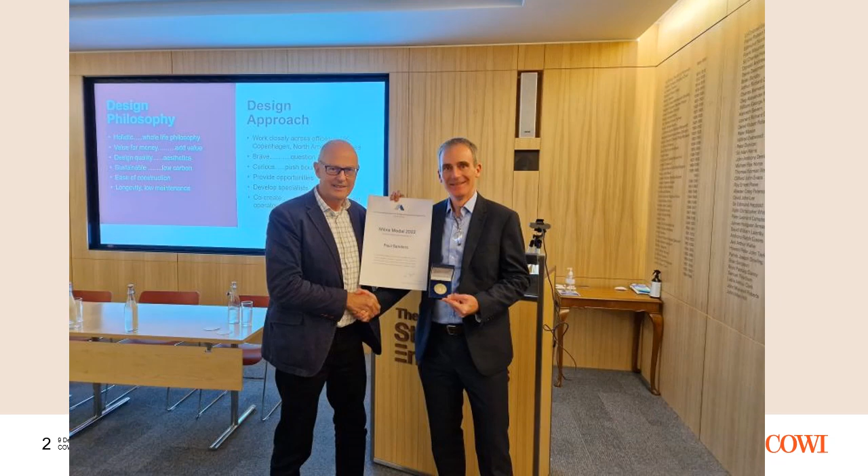I joined what was Flint and Neil and has now become part of COWI in the UK a little over 20 years ago. At that time, it was a partnership run by Ian Firth and David McKenzie. It's now part of a much bigger organisation. But I think the philosophy that Ian and David brought, or had with the organisation, and brought through into COWI still remains very firm, and I think it can be summarised as follows.

And indeed, preparing for this lecture was a very good opportunity for me to condense my thoughts in this regard. I think we try to bring a holistic, whole life approach to all of our projects. We like to add value, and that's not just monetary value, that's adding value in lots of different regards. Design quality has always been at the forefront of what we do, and that's a philosophy that's very much been promoted by Ian Firth.

I think it's best summarised by his Institution of Structural Engineers presidential address just a few years ago. We work with architects on a great number of our projects, and I think that again is an extremely important way of adding value. That collaboration is really key to what we do. Sustainability has always been at the heart of what we do. I think the last few years have seen that condensed into a real focus around embodied carbon, but I think again that rings very true to what we do.

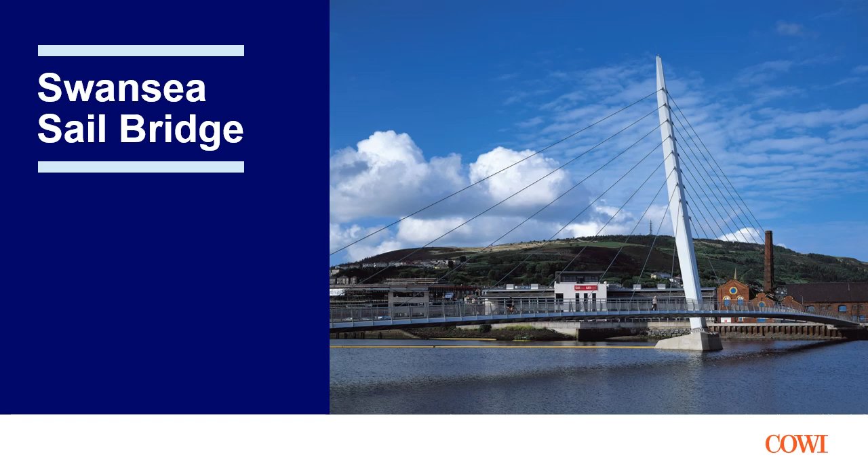So this was my first experience of working closely with architects and really starting to appreciate the value that they bring to projects such as this. I was very fortunate to work with Jim Eyre, who heads up Wilkinson Eyre, together with Martin Knight and Ben Addy, who I've gone on to work with on many other projects through the years.

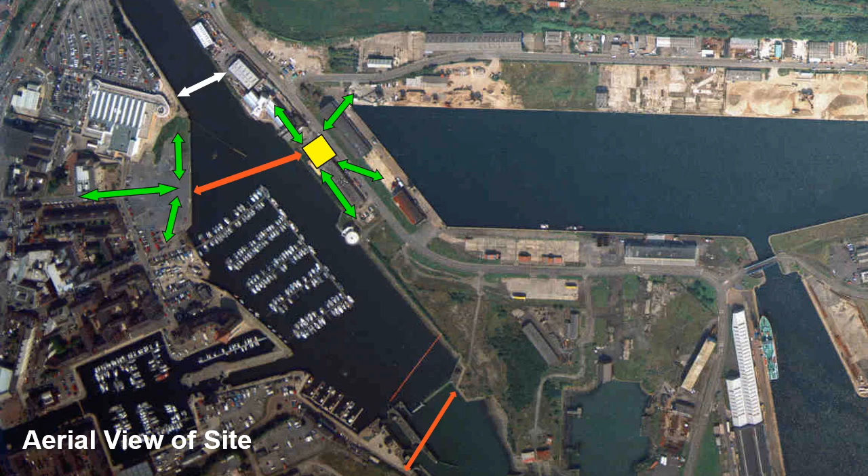This is the design that was developed for the Sail Bridge, very closely developed by Wilkinson Eyre and ourselves. The cable stayed bridge itself consists of a 42-metre high steel mast which is leaning backwards, with a gently curving deck which is supported off one side by a series of cable stays. Structurally, it's quite a unique configuration, I believe.

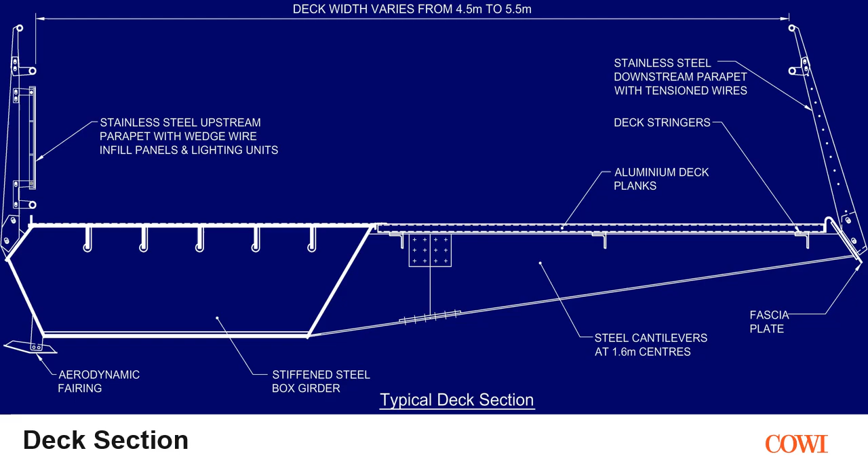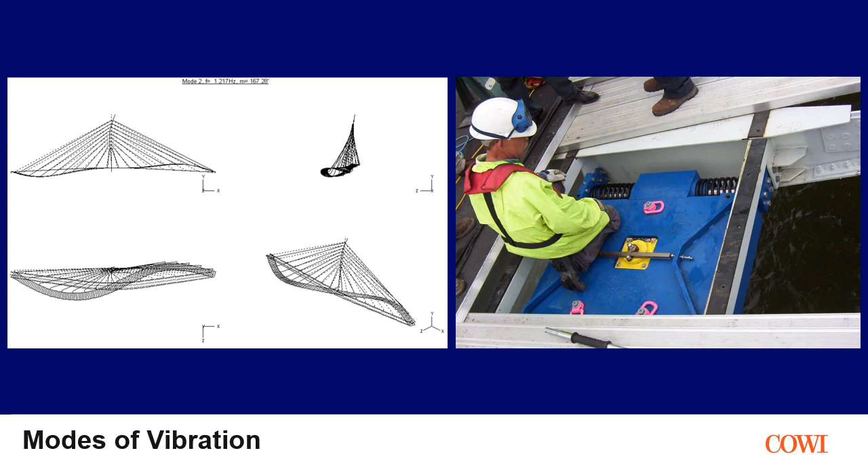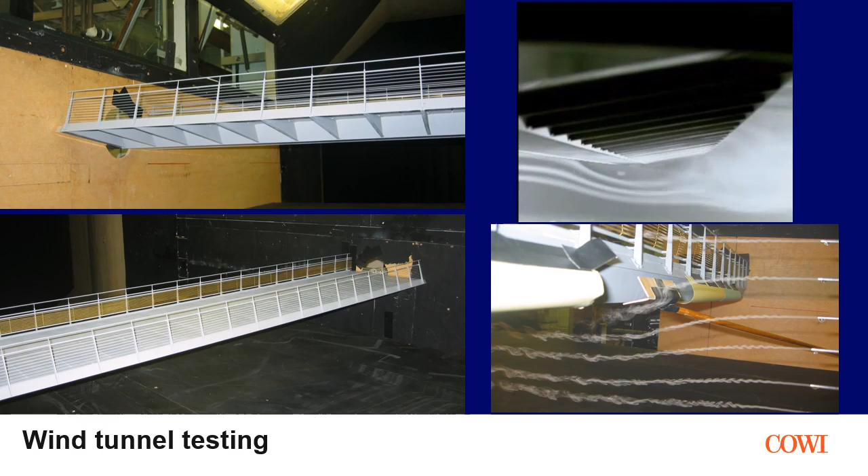This was typical of how Chris went about solving the problem. He investigated changes to the shape of the bridge deck cross section to get rid of the vortex induced vibration, and quickly concluded that adding an aerodynamic fairing on the upstream lower edge, shown in this photograph, provided a very effective means of suppressing it. It works by preventing the flow detaching so soon, which adequately suppresses the vortex induced vibrations. We were still at a point in fabrication where we could detail these stainless steel fairings and fix them on the upstream edge—it was quite a neat solution.

This photograph also gives you a good appreciation of the parapets, in this case all stainless steel, very carefully detailed. That's important because the user experience is all around the quality of those finishes.

Now to talk about the construction—this goes back to one of the key philosophies I spoke about earlier, collaboration with the builder. The mast itself was actually quite a complicated geometry. We engaged in very early discussions with Rowecord, the fabricator, to understand what was and wasn't possible. Basically the mast geometry is defined by a series of flat plates—there are no warped plates—but through careful sculpting by the architects, we were able to come up with this fantastic looking mast geometry.

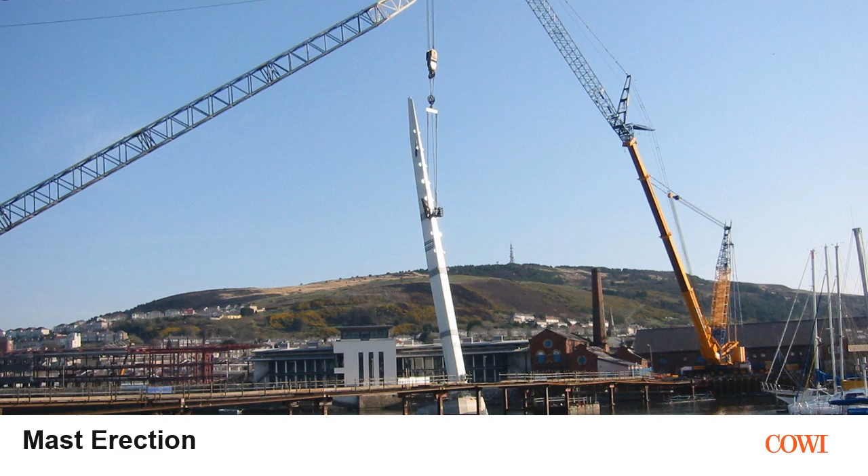This was then the erection of the mast. The mast itself weighed around 80 tons, and was erected using a crane positioned with a lift radius of around 80 meters. At the time, this was one of the largest mobile cranes used in the UK. By erecting the mast as one completed unit, we ensured better quality of construction and a faster construction program—one of the key aspirations of our client, the Welsh Development Agency. That approach was developed in conjunction with the contractor Balfour Beatty.

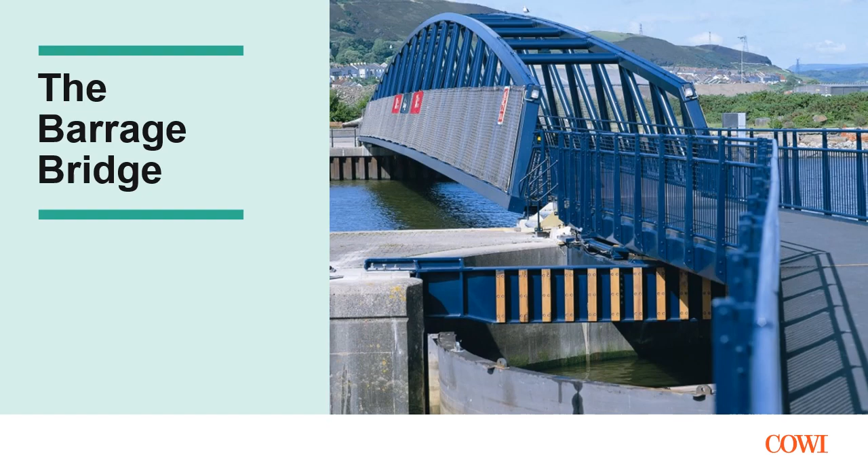Now, I did mention at the beginning that the Sail Bridge was one of a pair of bridges. The other bridge was what we call the Barrage Bridge, which crosses, not surprisingly, over the barrage somewhat further south. It's not necessarily the most hospitable of locations, but the real eye-opener for me was that even though this was a secondary bridge, it was still given a significant degree of care and attention in terms of detailing.

In this photograph you can see the Barrage Bridge, with the Sail Bridge in the background. Working closely with the architects, they showed me that by carefully modifying the geometry of the Warren Truss, you could come up with something reasonably attractive, even though it's a low-cost solution. I think you'd probably agree it's quite an elegant structure, even though it's quite modest.

It's around a 70-meter span and about 5 meters wide. The view on the right-hand side gives you a feel for the user experience—by inclining the mast and the trusses inwards, you enclose users, creating a safer feel, and you increase the structural efficiency by stabilizing the top chord using those simple transverse bracing members.

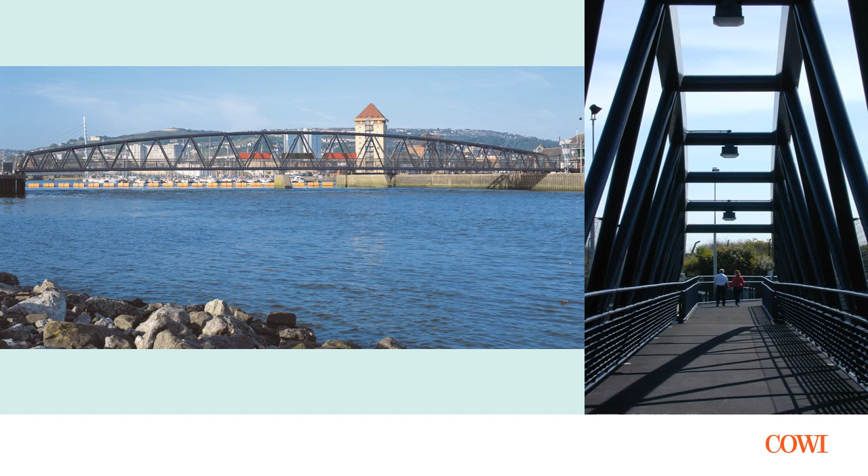The next bridge I'm going to talk about is the Schuman Bridge in Lyon, France. This was a project we won through a design competition with Explorations Architecture, a Paris-based firm we've had a very successful track record with, together with consulting engineers Agibat from France. Our role was to design the superstructure, the deck and the arch, as well as leading the design team overall.

This was a hugely challenging project for me personally, because slightly embarrassingly, I don't speak French. I managed to attend numerous meetings over the 18 months or so that the design period lasted, and I managed to understand enough of what was being said, even though I struggled to reply. The bridge itself is located adjacent to a UNESCO World Heritage Site in Lyon, and for that reason enormous focus was placed on the appearance of the bridge.

So this shows the overall geometry of the bridge. You've got main spans of around 85 meters. We decided very early on that we didn't want any cable stays, we didn't want masts. We wanted a very flat structure, as near invisible as possible given the setting, yet with a fairly significant span that does introduce a challenge.

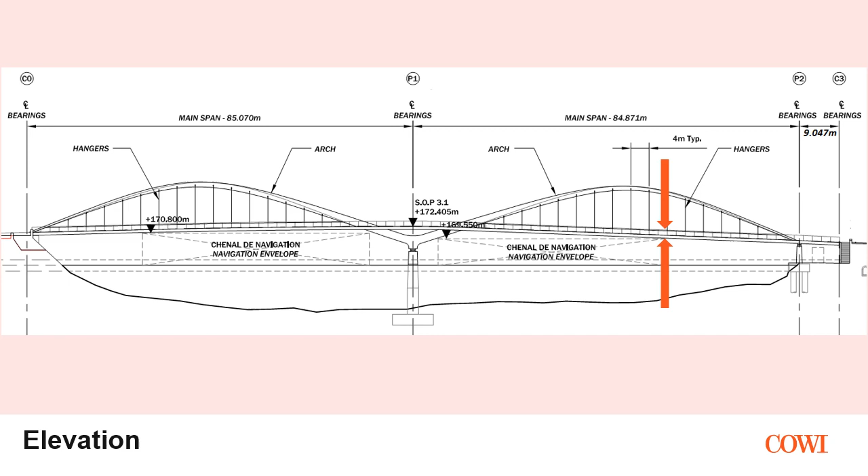So the solution was this wonderfully slender arch. In cross section here, you can see the very shallow deck, only around 600 millimeters deep, and the arches inclined and leaning outwards. We used the arches to actually separate pedestrians from vehicle traffic, and I think that adds something quite special to the quality of the design.

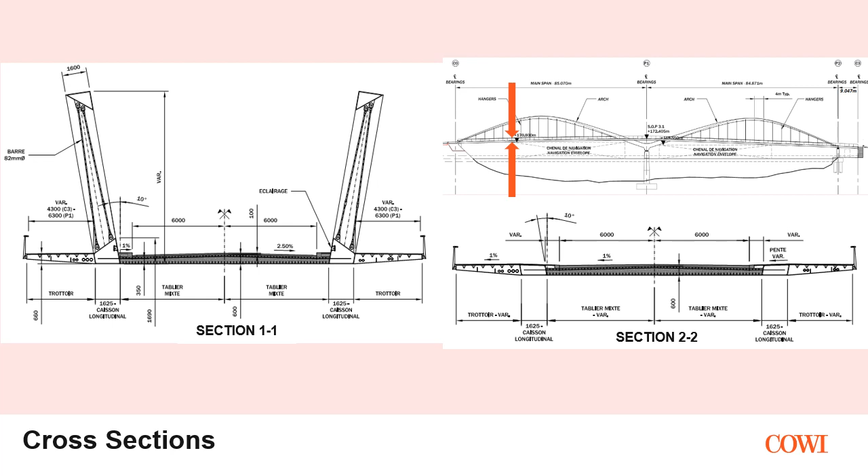Again, this is the perfect example of that very close collaboration with the architects. There was a drive to create these nice wide footways and to create places that people want to stop and rest and enjoy the fantastic views up and down the river.

Besides having this wonderfully slender, unbraced arch, the architects wanted to exploit the arch's ability to reflect light by creating a twisted profile to the arch. To the best of our understanding, this is the first time this kind of design has been developed. It's done, on the face of it, in a very simple way, by taking what's called WP3, the outward pointing edge of the arch, and moving it up as you go from section A to section B to section C, then back down.

That means the two primary top and bottom plates of the arch are warped, twisted, whereas the inside face of the arch is maintained on a constant plane with no twisting there. Key challenges for us were, first, how do we design the arch for such a twist? There are no design rules available for such a variation. And secondly, could it be fabricated?

In terms of the fabrication, we went to Victor Buyck, the fabricators, and had some very early discussions within the design period about how this could be done. They were very confident it was feasible and gave us some fantastic advice.

The fabrication process itself, here you can see a section of the arch being fabricated by Cordioli, the Italian fabricator who eventually won the contract. The wonderful thing for me is understanding the whole fabrication process, and particularly working with their very skilled craftsmen, I would call them artisans, who were able to introduce the twist that we wanted to the arch.

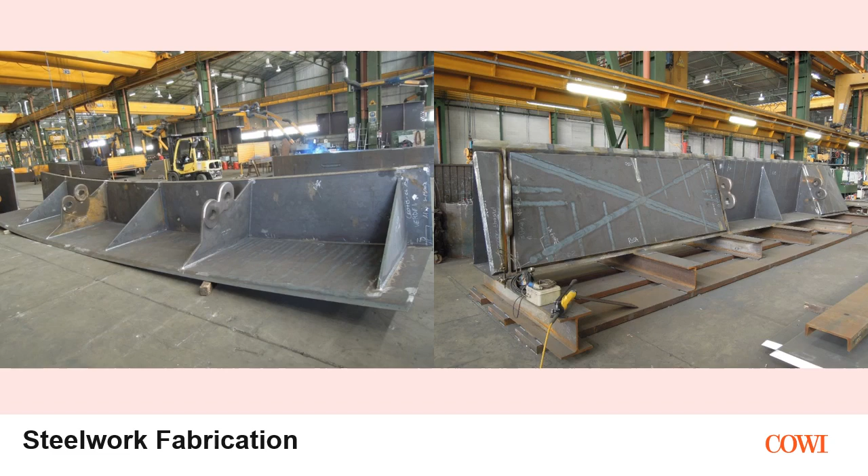Now that twist is actually relatively modest, about 1 degree per metre length as you move along the arch. But the twist is introduced, as you can see on the right hand side, by heating the arch or the plate in certain locations. The process is effectively to force fit the first two plates, and then the closing plate you heat and force into position, and the striations you see on that plate are a result of the localized heating to introduce the deformation required.

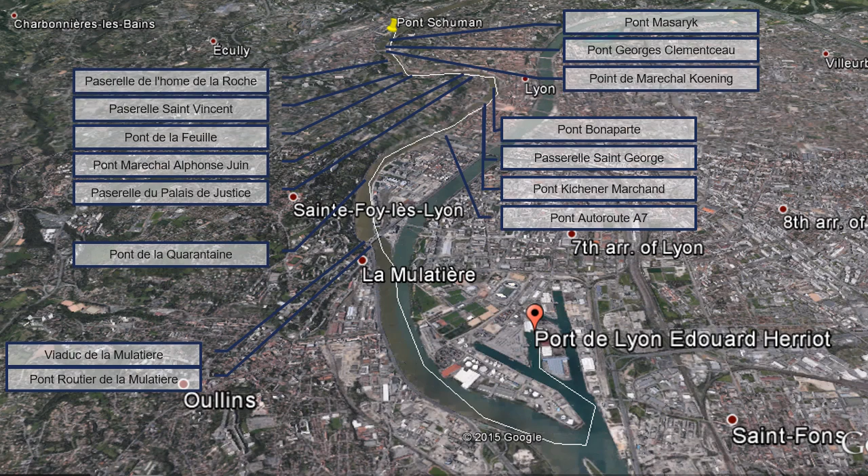To enable construction of the bridge, we identified a port on the south end of Lyon that was available for pre-assembly, because there was insufficient space at the bridge location itself. However, the port was made available. The challenge was that we had to navigate from the port to the final bridge location, where the yellow pin is, passing under some 15 or so existing bridges.

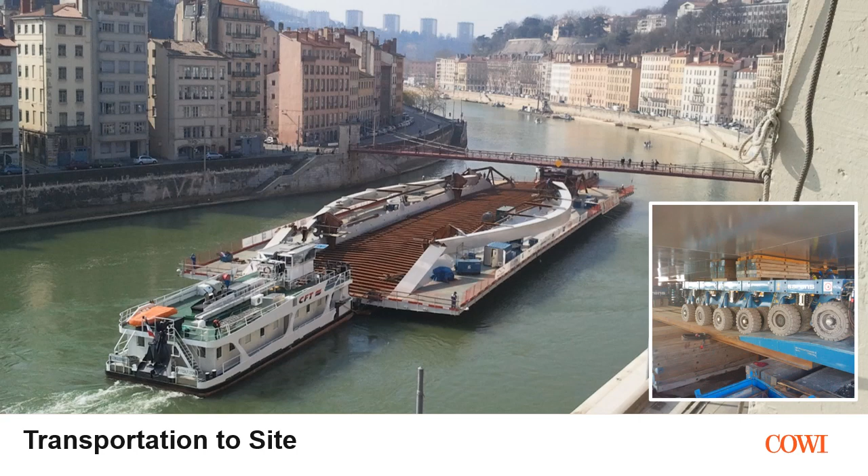Here you can see it being trialled in the dock before the bridge is moved out. Here's a view showing the bridge being moved up the river. It passed under one of the bridges with only around 150 millimeters of clearance. But this was all surveyed in advance, so we were confident it was going to work, though it was nevertheless somewhat nerve-wracking for Ollie and myself as the two spans were navigated upstream.

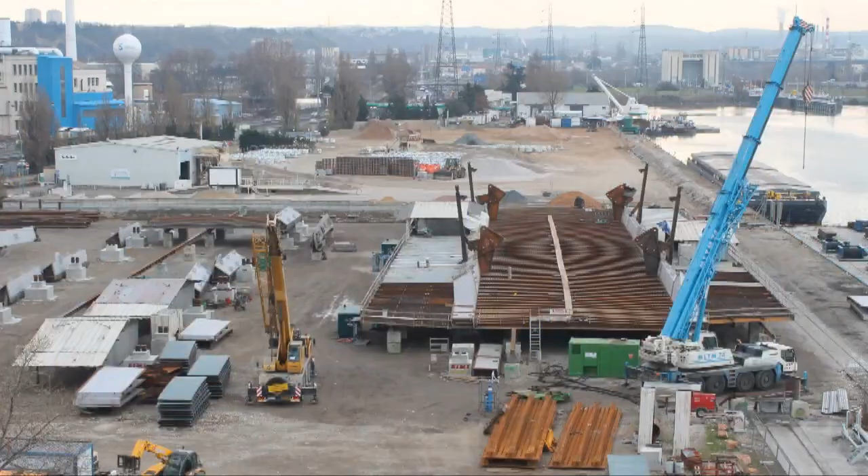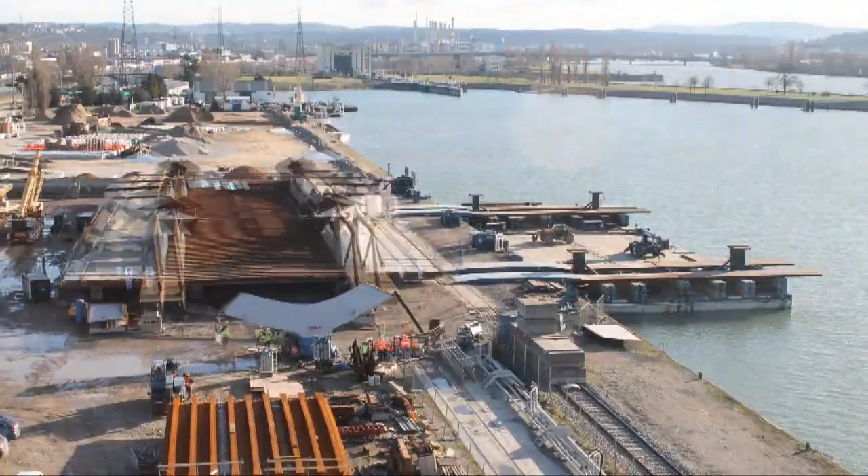I've got a time-lapse video here showing construction of the bridge. This starts in the port. You can see the two spans being assembled, and the arches being rotated down into the horizontal position. The bridges were then moved out onto a barge using SPMTs before they were floated upstream to their final locations. The two spans were moved in different operations around 2 or 3 weeks apart. I love this video because you start to get a sense of the location and the challenge of navigating each of these bridge decks upstream.

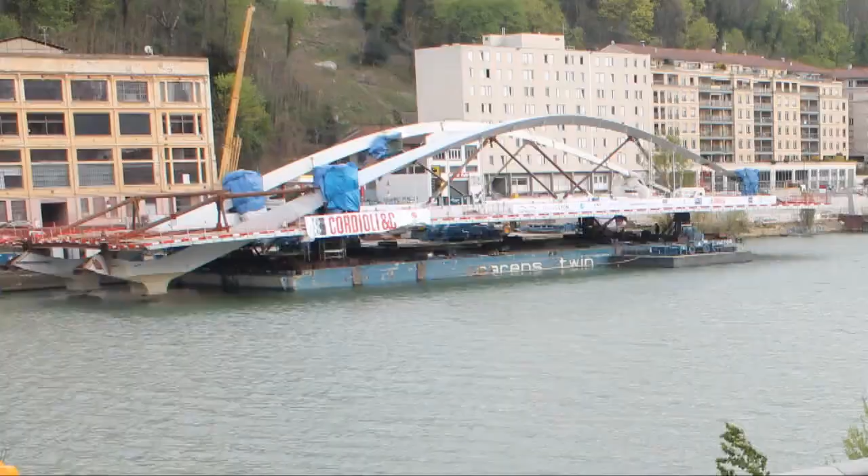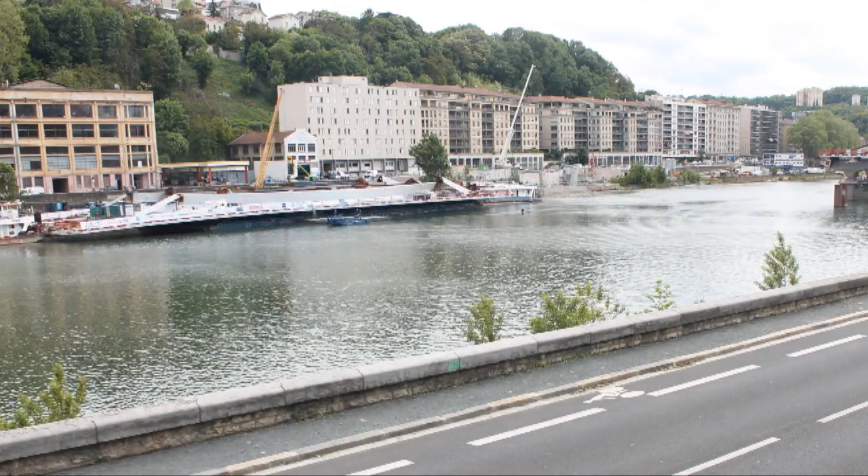So the bridge was actually fabricated and moved, transported without the concrete deck. The concrete deck itself was poured in situ. The deck consists of a series of steel transverse beams with concrete cast around - what we call an infill deck.

This is the second span being erected in exactly the same way. You can see some temporary bracing used to stabilize the arch there. And you've got this wonderful shimmy of a movement as the second span is brought in and gently lowered onto its bearings.

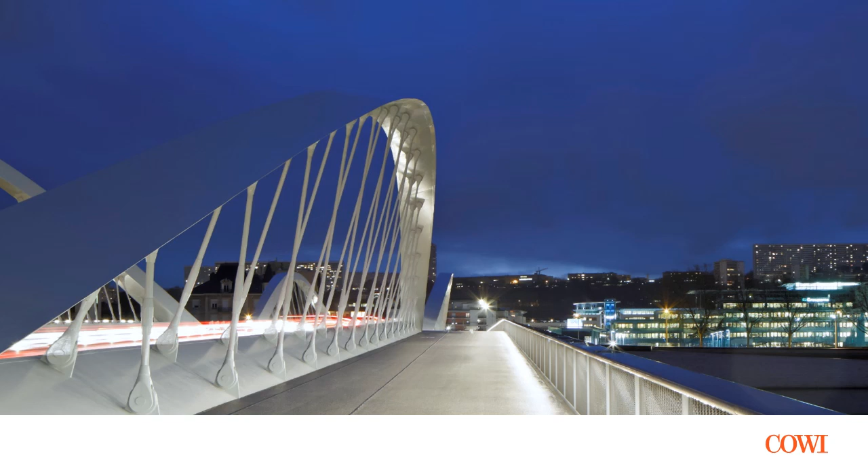Just a couple of views here to show the completed bridge. Again, I love the lighting on these photos, and it gives you a sense of the space available on the bridge deck for pedestrians and bridge users just to stop and enjoy the fantastic views both of the bridge and of Lyon itself.

I'm going to use Lyon as the first example to talk about embodied carbon. Within COWI we're fortunate enough to have a fairly substantial database of bridges we've designed, of a variety of construction forms. Ultimately most are beam and multi-span bridges, because that's by far the biggest demand, but we do have some arch bridges, cable stay bridges, truss bridges and suspension bridges to throw into the mix. Full credit to Cameron Archer-Jones and Dan Green for developing this database and the tools we now use readily to assess the carbon content of our designs.

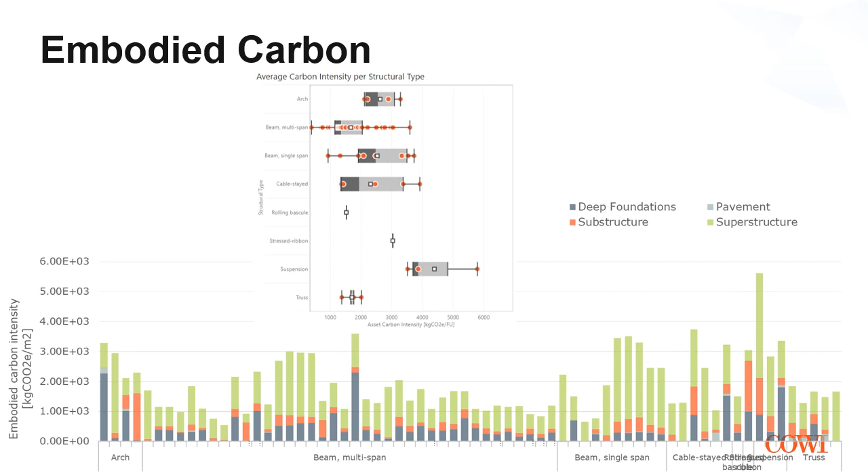It's worth remembering that for bridges such as arch bridges, as I illustrated on the previous slide, the embodied carbon for some forms of construction will inevitably be higher, and I think that's nicely illustrated by the example of Schuman Bridge here, which doesn't score particularly highly, around an F. But I think it's best to tell it like it is - this is an honest view of where we're at.

The next bridge I'm going to talk about is the Mersey Gateway Bridge in the UK. This has been by far and away the biggest project I've worked on, and at one stage within COWI, we had around 100 engineers working full time on it.

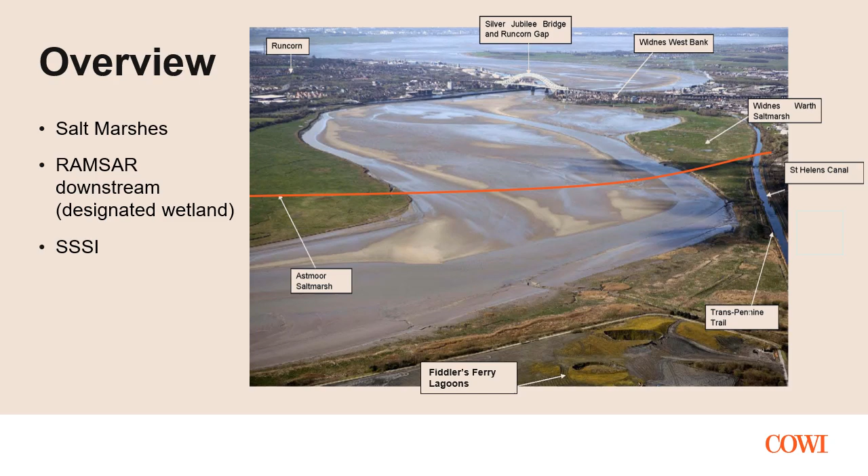The scheme is to provide a new crossing upstream of the existing Silver Jubilee Bridge, which you can see here. The red line shows the approximate location of the Mersey Gateway Bridge. Key constraints here revolve around the salt marshes, the Ramsar site downstream - a designated wetland - and an SSSI. I've included this example because, when we talk about more for less, the key thing here is working within the environmental constraints.

The constraints were fairly wide-ranging. There was quite an industrial legacy associated with the area, resulting in significant contamination on the bridge site. I won't have a chance to talk much about that today, but it certainly drove a number of key features of our design, where we worked closely with the contractor and with the likes of the Environment Agency.

The environmental constraints determined that we could only locate foundations in what were termed grey zones within the river itself - I'll come on to that in a moment. That effectively drove the design towards a cable stay bridge solution. We crossed the Manchester Ship Canal and the St Helens Canal.

Aesthetics were a key feature of this project, and there's a wonderful example here: the client, Halton Borough Council, were sufficiently well informed to engage architects to advise them on bridge aesthetics, and that had a significant bearing on the solutions eventually developed.

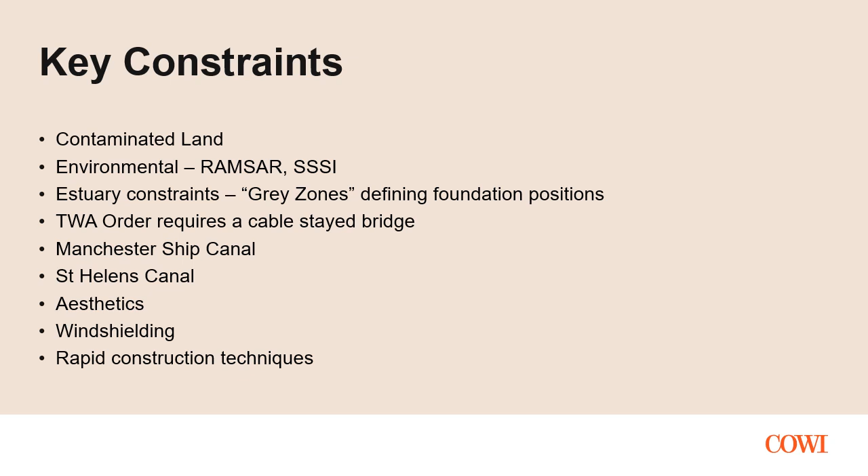Wind shielding was required to prevent the bridge being closed in high winds, a problem encountered by the Silver Jubilee Bridge. This was all about providing robustness around the transport corridors. And of course, being a concession contract, rapid construction techniques were critical, because the bridge doesn't start collecting revenue until it's open. So getting it open to traffic as quickly as possible is paramount.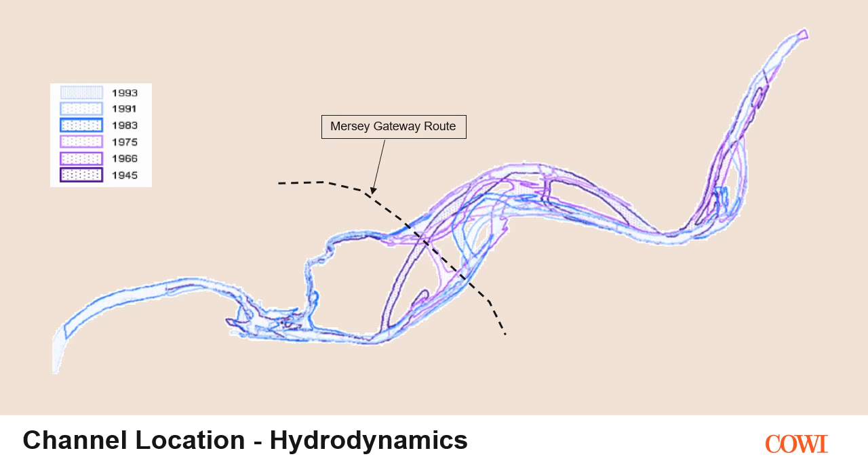One of the key constraints of the project is the very dynamic nature of the river. I've included this slide to show migration of the principal channels back and forth across the estuary over a number of decades. One of the key requirements of the design solution we provided was to avoid inhibiting in any way the migration of those river channels.

However, having a monotower really dictates the need for a torsionally stiff box for the deck itself, which is why that particular solution was proposed. The choice was made to cast the bridge deck in situ using the balanced cantilever technique, and I'll explain a bit about the construction process in a moment.

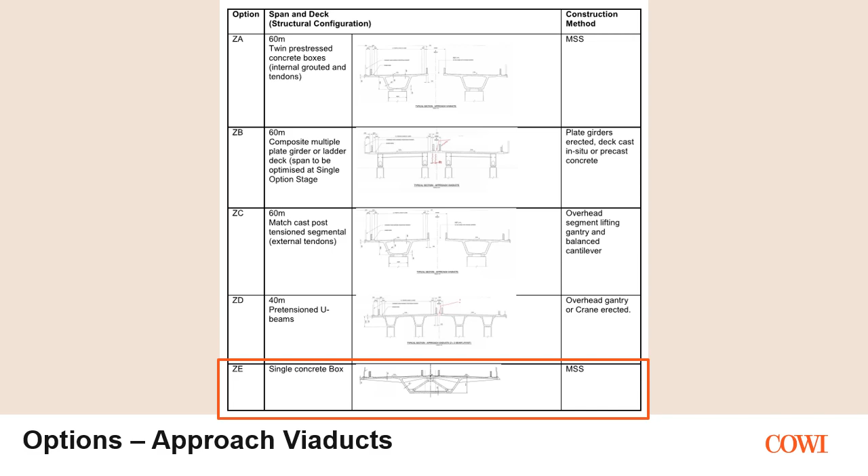In terms of the option selection criteria for Mersey Gateway, programme was key - the faster you can build the bridge, the more toll revenue you can collect, because the concession period starts from the moment you sign the contract, before construction starts. Maintenance is also key, and the real emphasis here is that the bridge operator is able to inform the inspection and maintenance regime they want right from the beginning of the design process.

And I think that goes back to a point I touched on at the beginning about the importance of longevity and reducing maintenance costs. Capital cost is of course always important. Aesthetics I've touched on already as being a key aspiration from the client side, and we engaged Dissing and Weitling to be our architects.

We've worked very successfully with Dissing and Weitling on a number of projects all over the world, and they worked integrated within our design team to develop the solutions.

Past experience from the contractor's side was a big factor in determining their preferred solution, and in particular they favoured in situ concrete construction. That was partly to reduce the maintenance costs associated with repainting of steelwork within the concession period, but the choice for in situ came really because the size of the scheme means it's not economic for precast segmental construction.

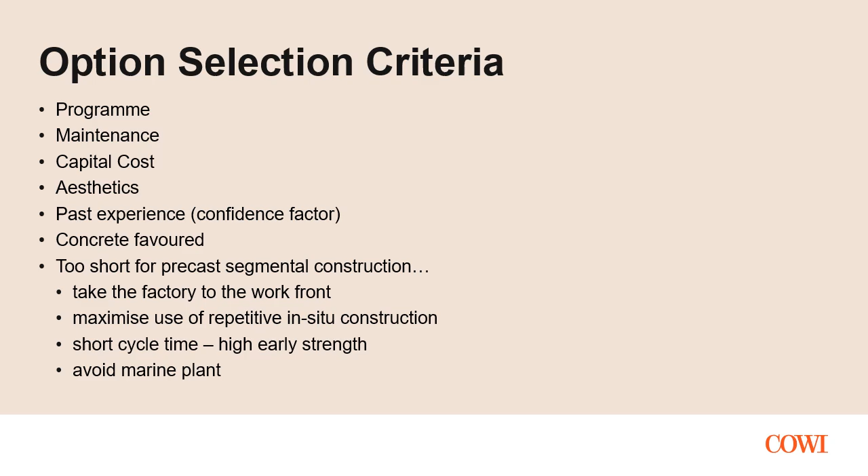So the philosophy here is to take the factory to the work front and maximise the use of repetitive in situ construction cycle times, which really requires early gain of concrete strength. And again, that's something I'll touch on in a moment, and avoiding the use of marine plant.

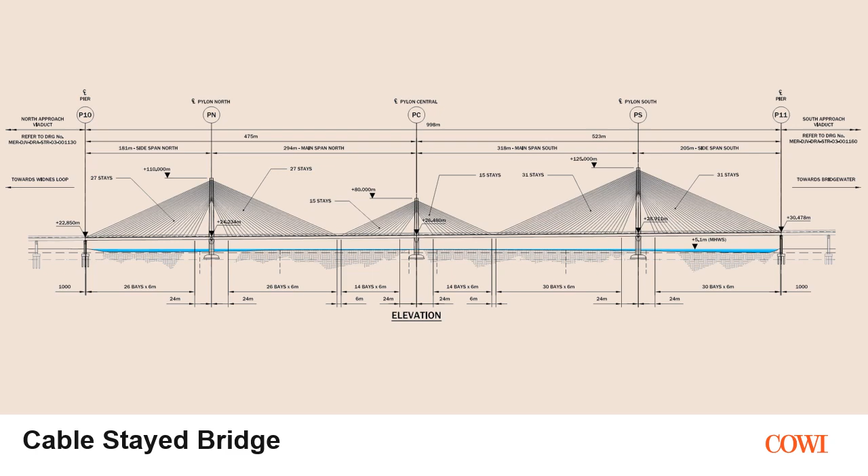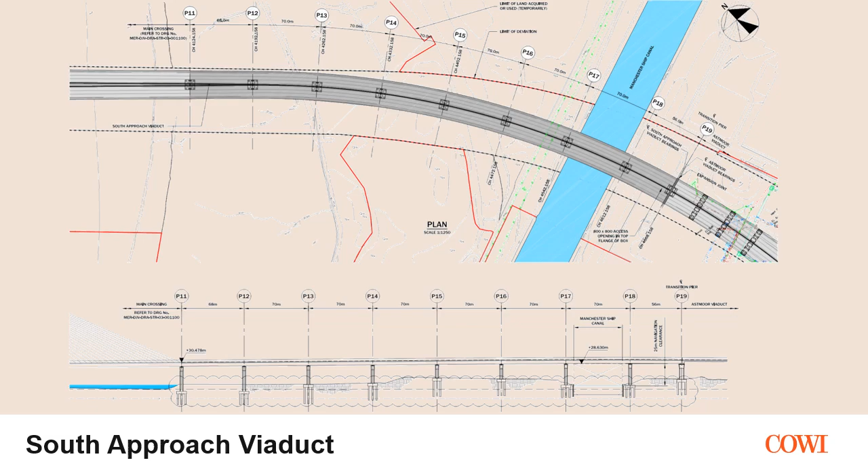And then similarly on the south viaduct, we managed to make some simplifications there. You can see here where we cross the Manchester Ship Canal and we lead on to what's called Astmoor and Bridgewater Viaduct on the south end to the right hand side here. Again, spans of the order of 70 metres.

In fact, one of the real features in terms of pushing the design is the fact that the 250mm thick deck slab is spanning some 6 metres between these ribs, but spanning 7 or 8 metres transversely as well. So we're working the deck slab quite hard.

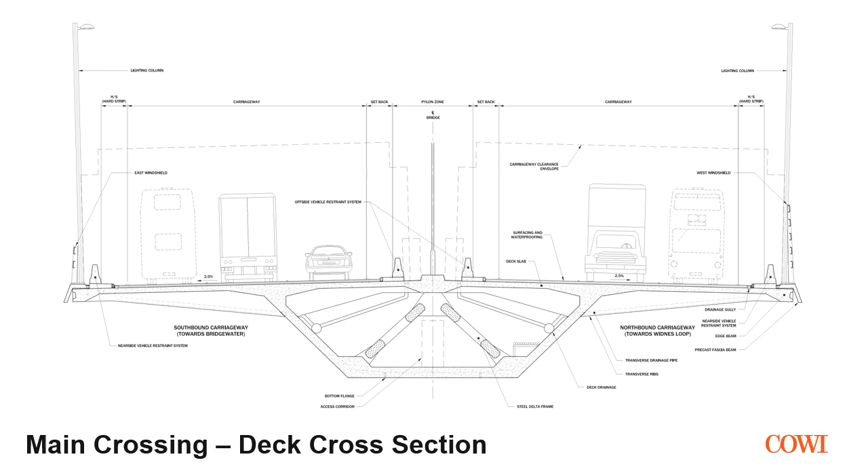And to make it span, as I described in the previous slide, over these fairly large bays. On the edges we have precast anchor blocks, and that's primarily to allow us to stress the transverse post tensioning as early as possible in the construction cycle, when the concrete is still quite young and still gaining strength. And the advantage these give us is that they distribute the forces from the anchor block over a much larger area.

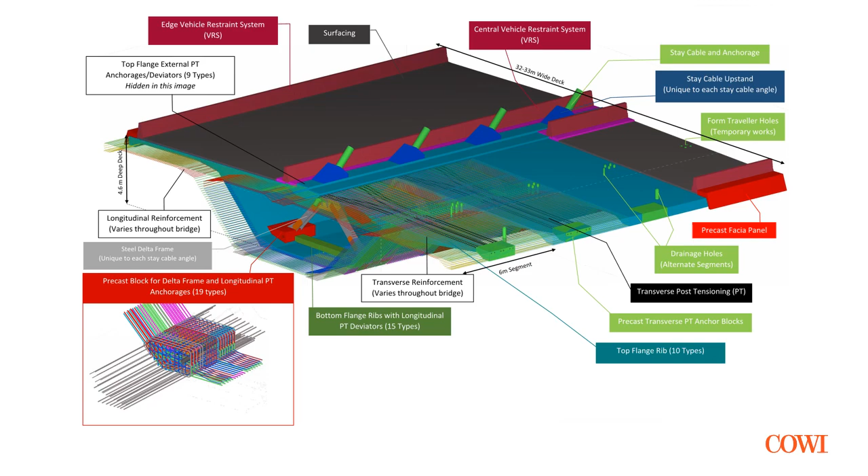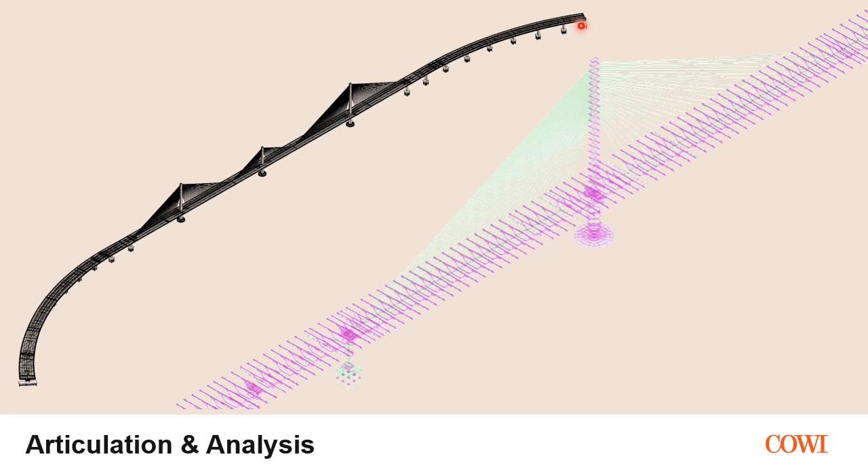That did create a challenge in terms of how we analysed the bridge, because it meant we had to have one model for the entire bridge, and this is to show our global model here.

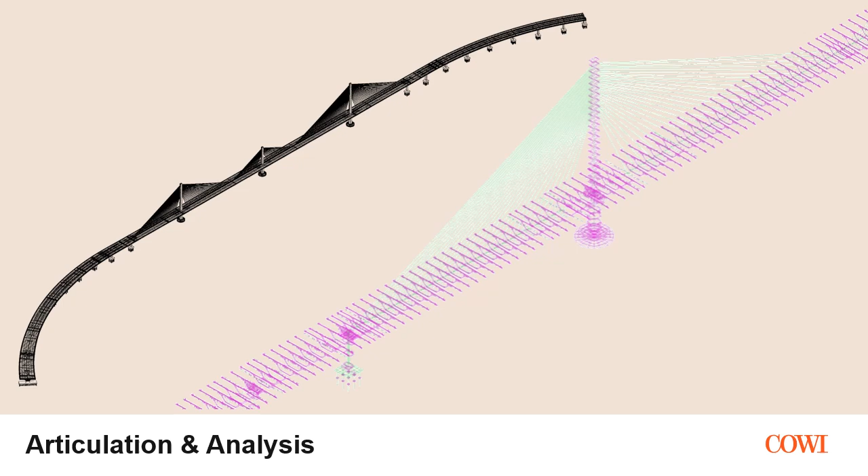The articulation is such that all of the longitudinal forces are actually taken on the centre pylon, resulting in fairly substantial, the highest bending moments appearing at that pylon. However, that pylon actually has the lowest overall vertical reaction, which created some challenges in the design itself.

We had to undertake aerodynamic testing of the bridge deck cross section to prove both the aerodynamic stability of the bridge deck and the performance of the wind shields themselves. You can see the wind shields in the left-hand photograph. We also undertook testing of the pylon itself.

You can see the pylon in a wind tunnel here, where wooden blocks are being used to recreate the right levels of turbulence in the wind flow.

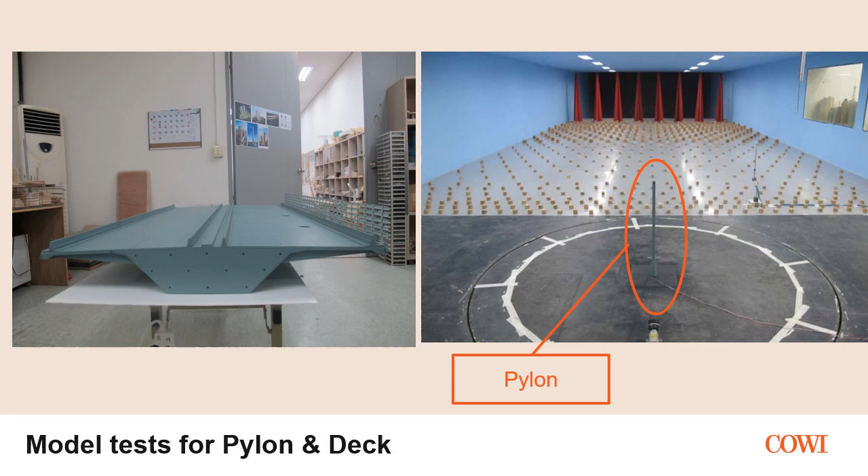Again, using our specialists not only to supervise and advise on the wind tunnel testing, in this case done by John Rees, one of our wind experts internally, but we also had the ability to undertake CFD analysis of the bridge deck cross section in advance of the wind tunnel testing, which was particularly useful in advising the performance of the windshields themselves.

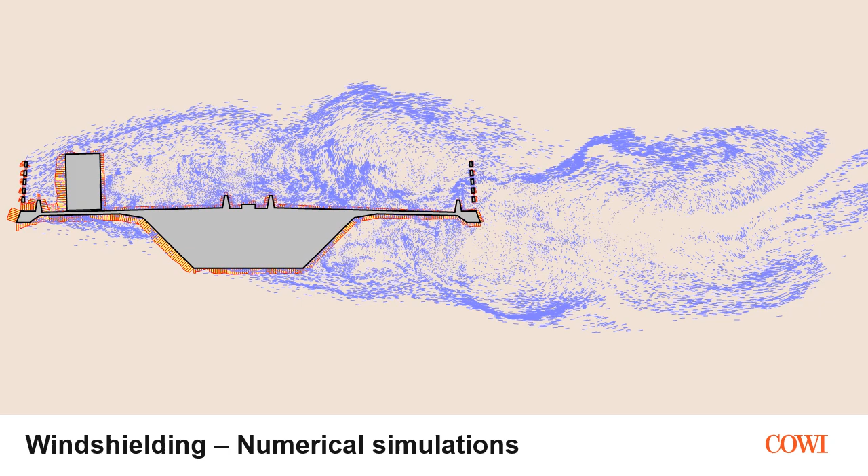Here you can see the actual bridge deck cross section being tested along with our simulated high-sided vehicle, which here this model is being used to measure the overturning moments on the vehicle.

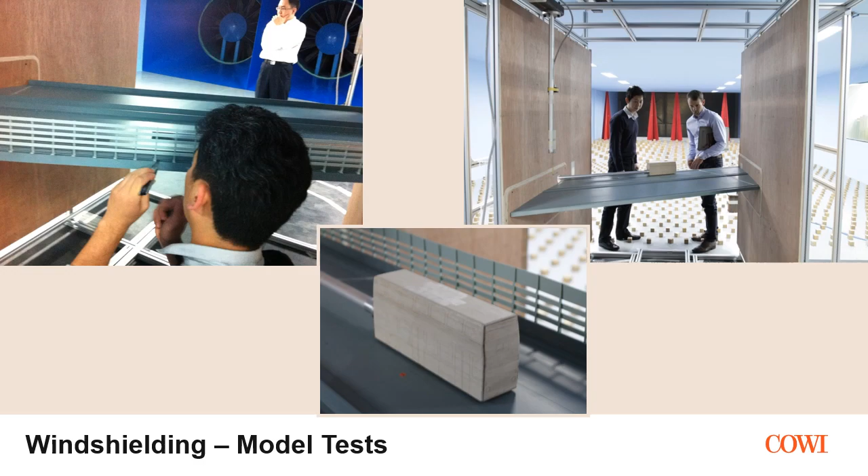Now, I haven't talked about the other structures on the project, but one point I wanted to get over here was the importance of developing a family of structures, and we did this by working very closely with Dissing and Weitling, so that there was a common resemblance throughout the project.

You can see here the main crossing on the centre image and the two images with the pylon on the left, but on the right hand side you can see the family of structures we developed to be used elsewhere on the project, and I think that was a key positive for us.

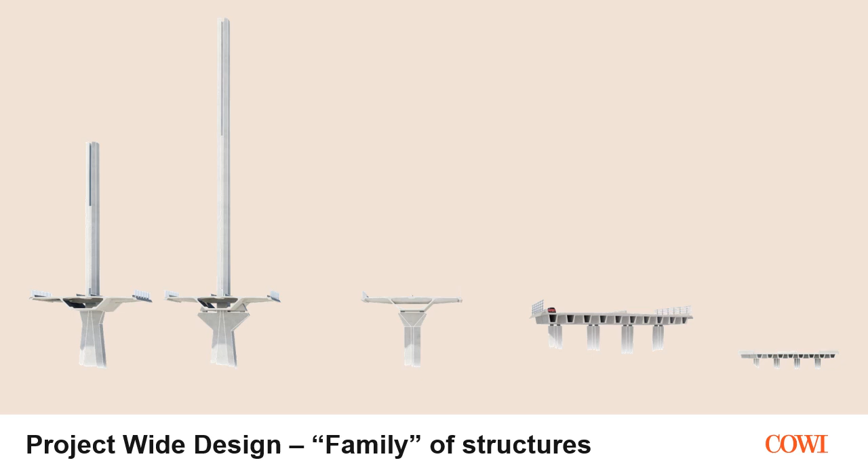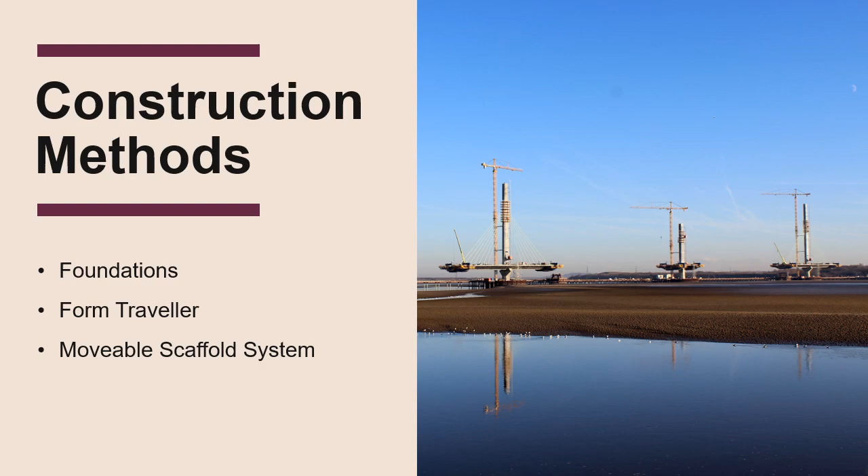In terms of construction methods, I'm going to talk about some of the foundations, the form traveller used for the cable stay bridge, and then finally the movable scaffold system used for the approach viaducts.

Very early on in the development of the design, Hugo Wood from our side, one of our leading geotechnical engineers, came up with a proposal to use spread footing foundations for the main pylons, because the sandstone was at relatively shallow depth, as can be seen on this image here.

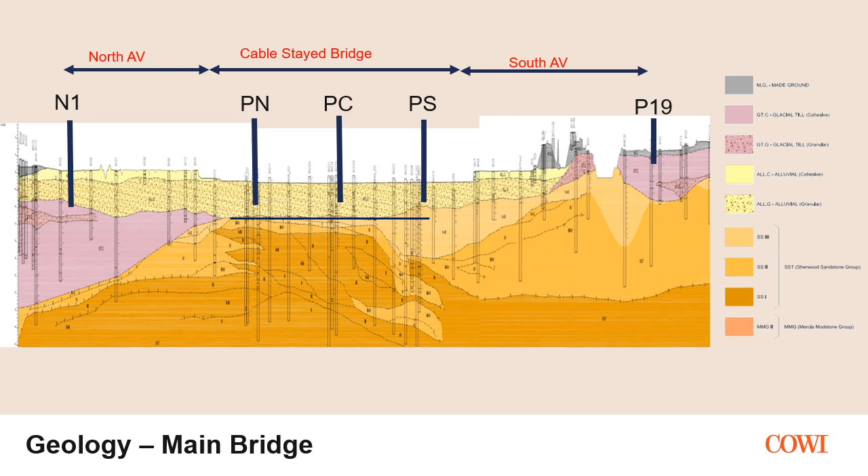On the north and south approach viaducts, we did in fact have conventional pile foundations, but they were developed by Hugo and his team to be incredibly efficient.

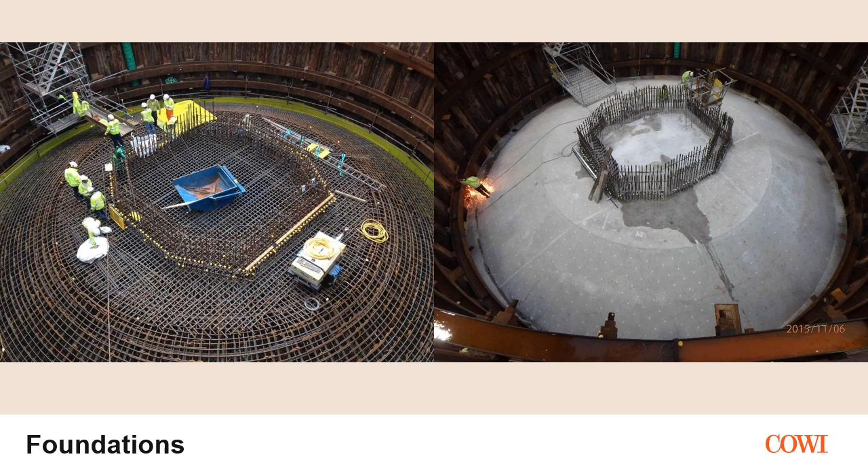Here you can see the foundations in a more advanced stage of construction, and finally the casting of the first of the foundation.

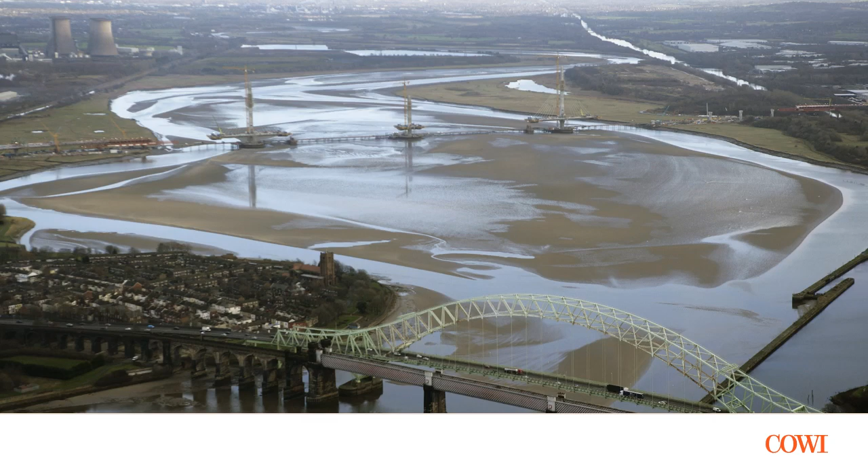The cable stay bridge itself was constructed using a fairly conventional system of balanced cantilever construction, casting 6-metre long segments one after the other in a balanced fashion, after the pylons have just been erected using a jump form system.

We did in fact need to have two temporary towers here and here in order to stabilise the longer of the spans during cantilevering.

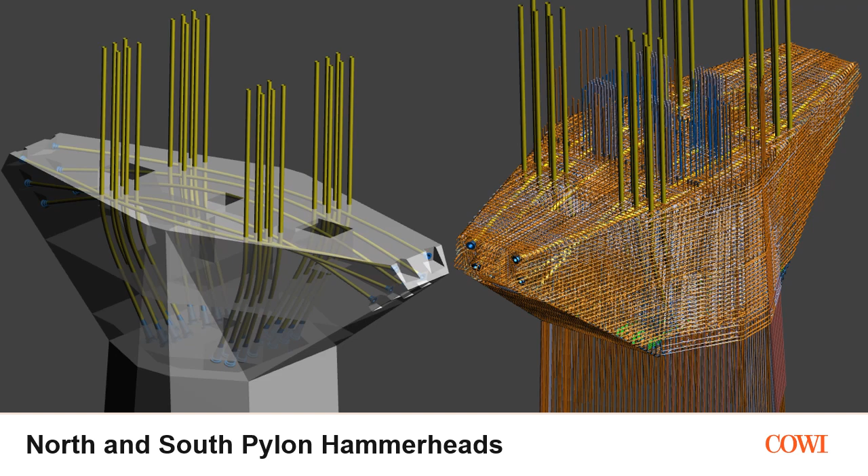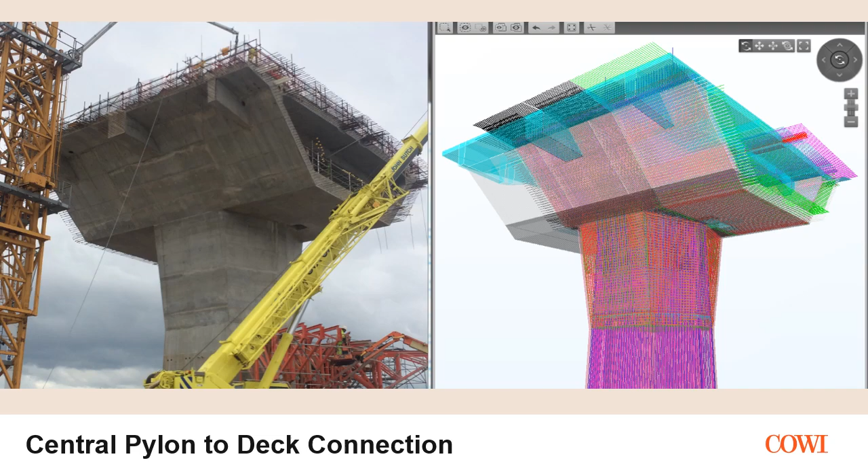But this was fantastically useful because it allowed us to check for clashes before construction progressed.

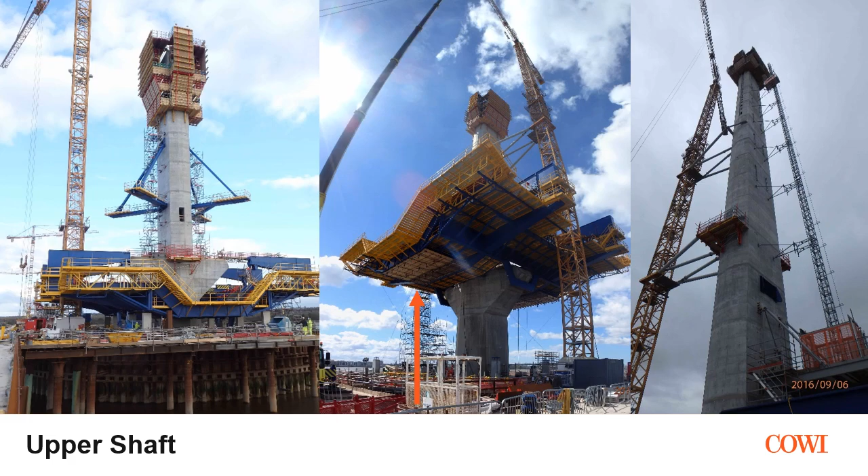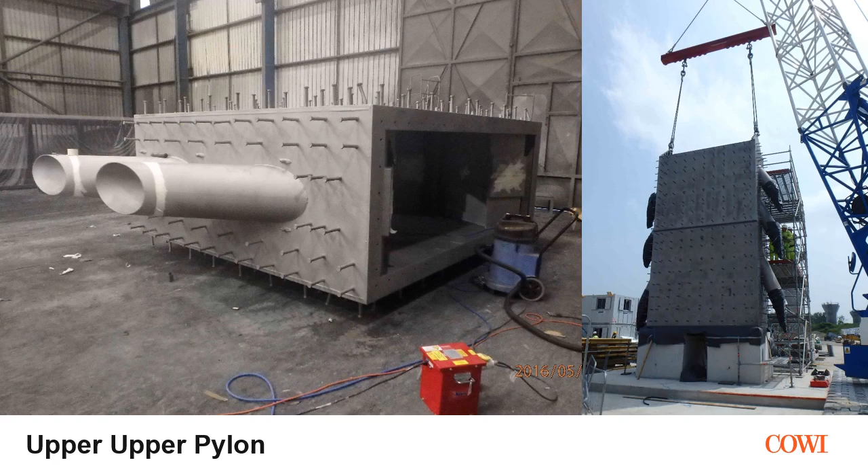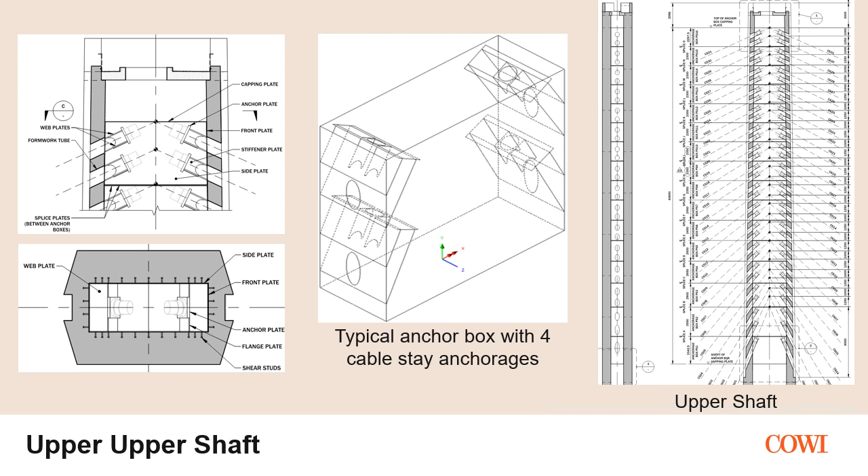This shows fabrication and assembly of the internal fabricated steel box used for the cable anchorages. The cable anchorages are relatively conventional, and the key feature here is that by prefabricating the steel boxes off-site, it gives us the chance to check the geometry of the stay anchorages in advance of them being lifted up.

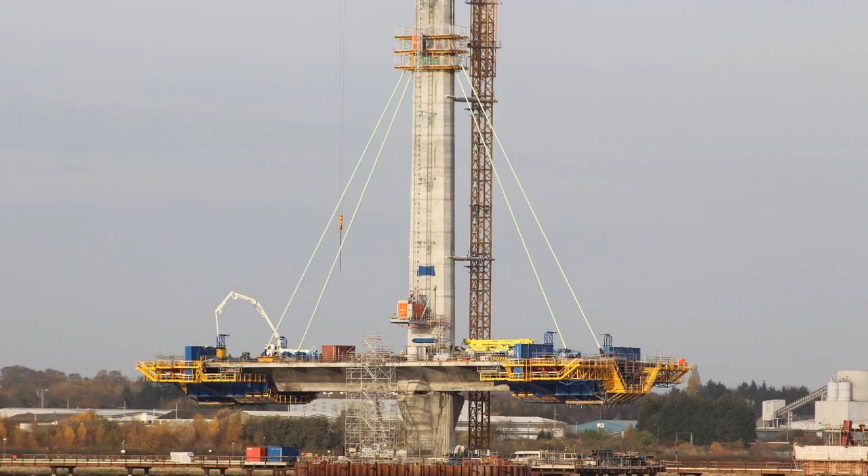Just to talk a little bit about the deck construction, here you can see the form traveller cantilever construction just starting out.

Those spans are actually cast in 3 primary stages. Stage 1 is cast on the MSS. Stage 2 is the infill slab, and stage 3 is the cantilever wings. The reason for casting stage 2 and stage 3 separate from the MSS is really to decouple critical path activities.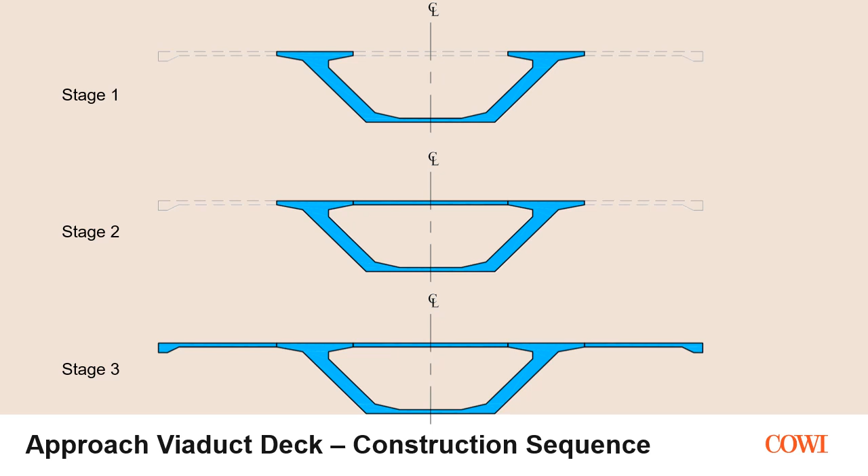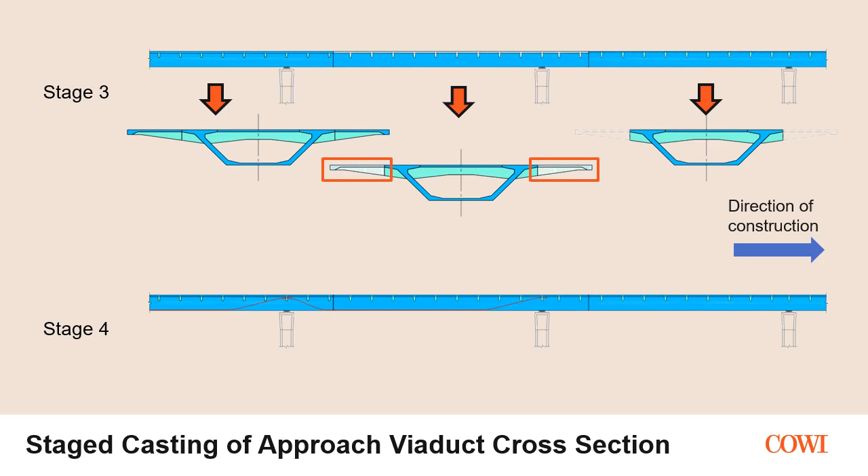So here you can see the first stage being cast, which is cast on the MSS, the infill span, which is cast using a conventional falsework system propped off the bottom slab, and then finally the cantilever wings, which are cast using a completely separate form traveller system.

I like this view particularly because it shows all 3 stages of construction for the approach viaducts: stage 1 on the MSS, stage 2 is where that infill slab is being cast, and stage 3 is where the cantilever wings are being cast.

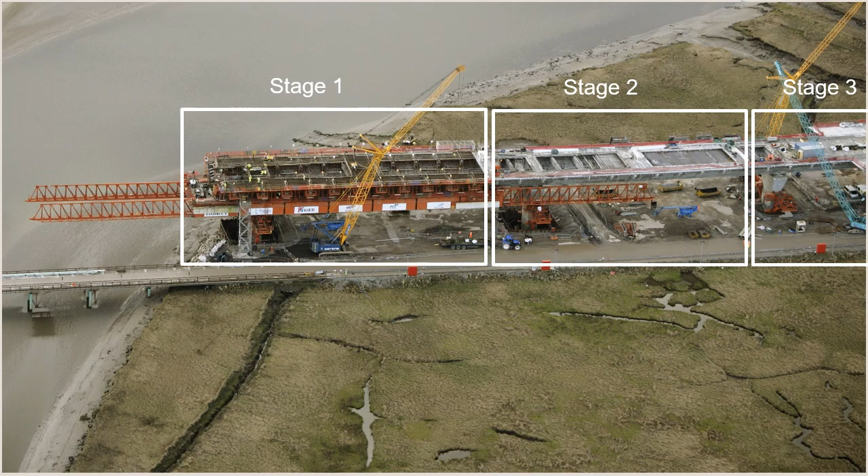In terms of embodied carbon, we're actually really pleased with Mersey Gateway. It scores a B on the SCORS rating, which is very impressive when you think of the span of the bridge. Normally, as the spans get longer, you'd expect a slightly lower rating, slightly higher embodied carbon, but actually I think this nicely illustrates the efficiency of this design.

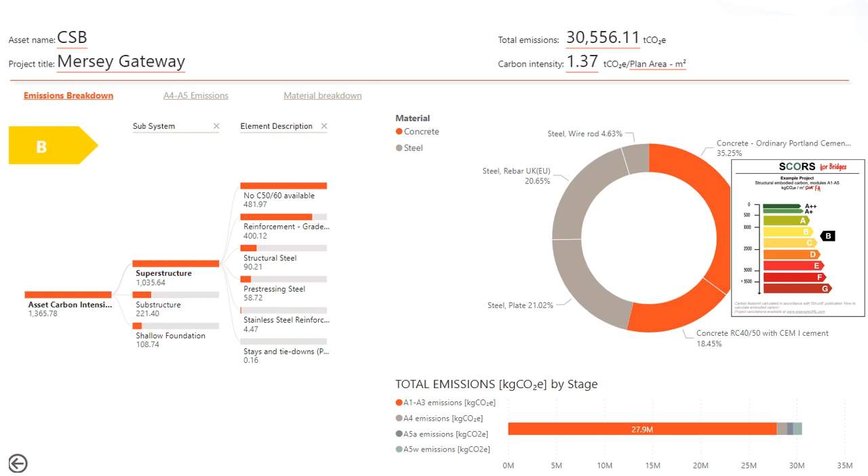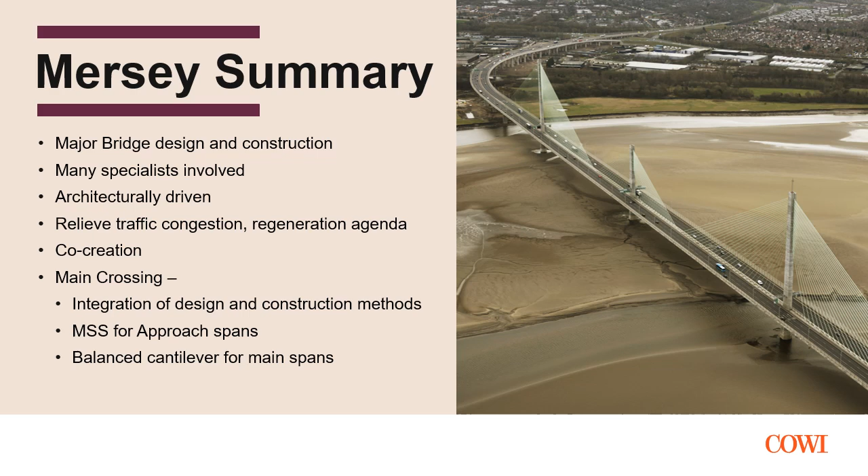So in summary, this is a brilliant example of major bridge design and the integration of construction methodologies. There were many specialists involved. Architectural design was key to the solution in many regards, adding enormous value in terms of relieving traffic congestion and promoting regeneration in the area. In terms of co-creation, it was a great example of how we as a unit work very closely with our clients, as well as the wider design team and the contractor.

My penultimate project is really quite different. This is a project in Bangladesh to design foundations for a 400 kilovolt crossing. We first became involved in this Padma project back in 2007 when Ian Firth and I travelled out to Bangladesh to write the terms of reference for the design of the Padma Bridge. We subsequently became the independent design checker for the bridge, and then in 2018 we were invited to prepare the design for this 400 kilovolt line crossing, just downstream of the Padma Bridge.

So the real challenge around Padma Bridge is actually around construction of the foundations. You're sitting on extremely poor quality soils with no rock to speak of at any depth. The river itself develops deep scour channels down to minus 47 metres on a 1 in 100 year return period basis. Any foundations in the river are particularly vulnerable to ship impact and seismic effects, given the foundations cantilever from the riverbed.

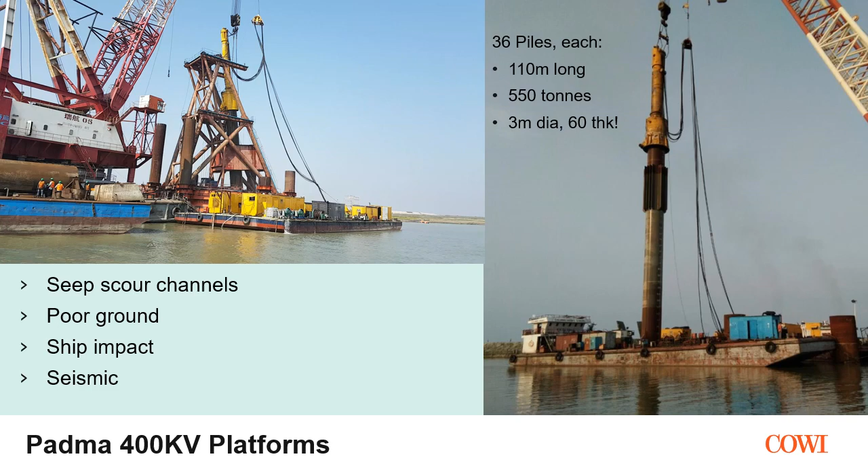The piles themselves are quite massive. In this case, they're around 110 metres long, and weigh of the order of 550 tonnes each. They really are quite something.

My final project today is actually a pair of bridges in Brisbane that forms part of the Green Bridges project promoted by Brisbane City Council. This has been one of my most enjoyable projects in recent years, and I think it illustrates a number of the features I've discussed earlier on.

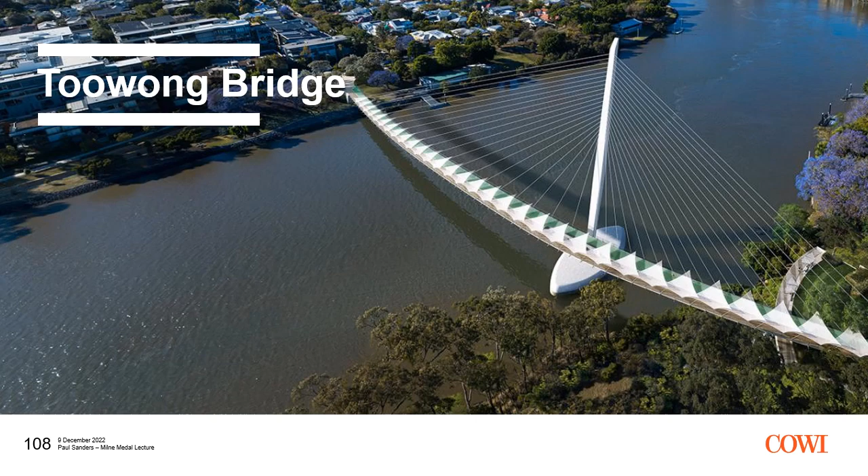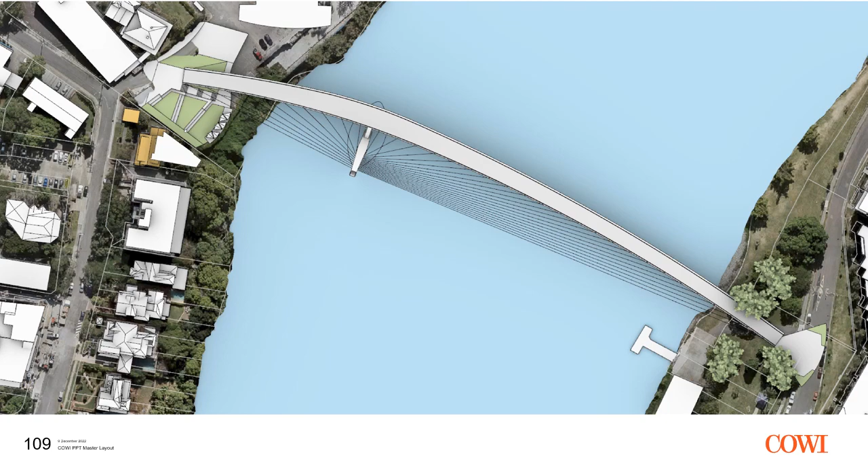This is very much a development of a similar structural principle, but it was very much developed to suit this particular site. On the left hand side you've got the Toowong area, on the right hand side you've got the West End area. One of the key constraints here was to minimise foundations in the river because of the bend you saw earlier on. We wanted to avoid having obstacles that could impair the free movement of quite a significant volume of river traffic here, so there really was a key driver behind going for a cable stay bridge solution.

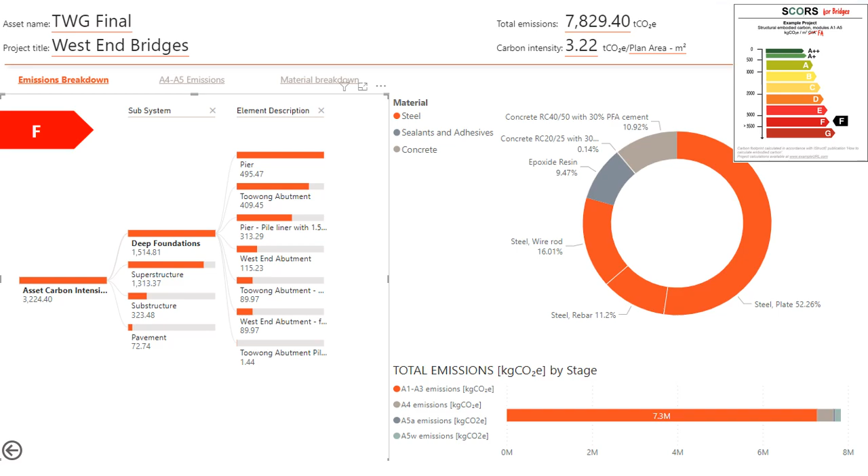In terms of embodied carbon, this bridge comes out with a rating around about F, but I think, as I alluded to earlier on, it's important to remember that for this bridge type, actually that rating is reasonably good, because we're talking about longer span structures and more challenging foundation conditions. You can see the SCORS rating up in the top right hand side. Of course, the dominant material here is steel.

This is the St Lucia Bridge. This is altogether very different, whereas for Toowong we were quite happy to have a tall mast that drew the eye, as it were, for the St Lucia setting, we wanted an altogether much more low-key structure that was less visible.

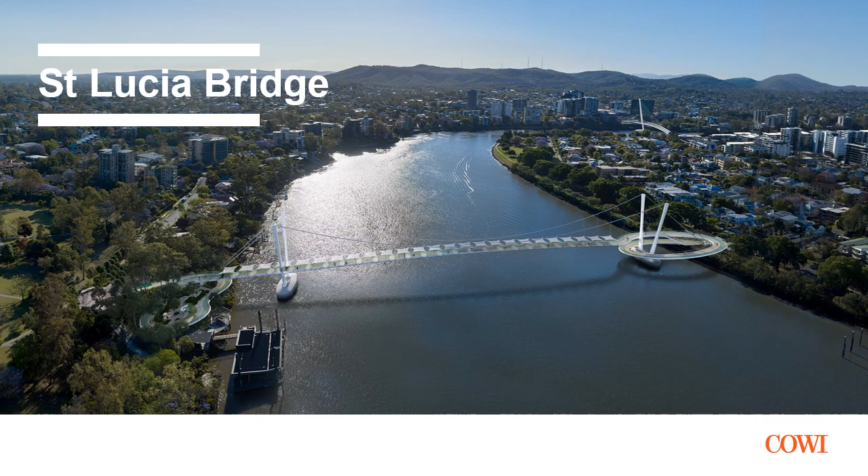However, at St Lucia, the single biggest constraint are the ramps and the tie-ins at each end. So in the middle of the river, we still need to achieve the same overall clearance, but getting down to the riverbanks on both ends was a real challenge.

Working very closely with WilkinsonEyre, Jim in particular, we came up with this solution where you've got this lovely curving ramp that snakes round. You do also have a stair access going down the middle, as you can see here. And of course, this is a suspension bridge solution, quite a different sort of structure.

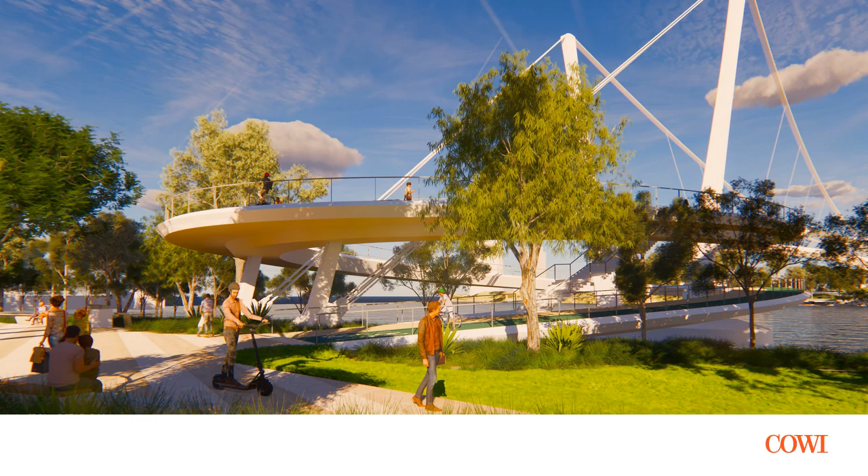And this is the ramp at the other end. In terms of embodied carbon, this again is very similar to one we're scoring around about an F. I think quite reasonable given the form of structure and the physical constraints that we face at the bridge site.

So in terms of a wrap up, I hope I've presented a few good examples to illustrate the types of projects that we at COWI have been involved in together over a period of around the last 20 years. I've only been able to pick a very small selection of projects, but I hope you found those interesting.

I think the key conclusions from my side are that as engineers we're facing increasing numbers of challenges and many more demands placed on us. I think it's really impressive the way we as a profession are responding to those. Cost and program have always been key drivers, but I think more and more these days we're seeing other features pull on our time and our demands.

Quality of design, I think, as I've illustrated, is always key, and I think we as engineers have a responsibility to remember that these assets that we're building are multi-generational. They are going to be there for decades to come, and it's really important that we put everything in to finessing those designs. I hope I've illustrated that a number of our designs have come about through that iterative process, always trying to improve the design as the design evolves. Making our designs durable and maintainable and reducing the whole life cost has to be key for all of us.